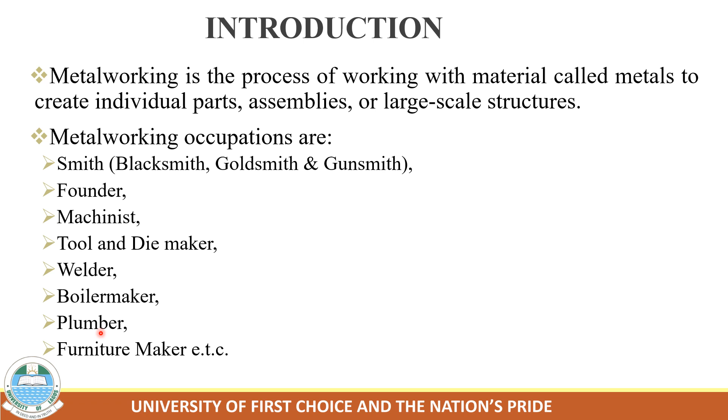So all these occupations are making use of metals for the fabrication, for production of tools and equipment that we are using in our lab, at our home, at office, everywhere. So anything that is made up of metals, these are professions that produce them one by one.

Metalworking. The term manufacture is derived from two Latin words, manus and factus. Manus means hand and factus means make, which means that metalworking is the occupation that involves making of any devices, any tools, any machinery with hand. That is the etymological meaning of manufacture. That is the root meaning of it.

And also the Oxford English Dictionary defines manufacture as to make or produce goods in large quantities using machinery. That is how the dictionary defines it. And let us move further. Manufacturing can be broadly classified into subtractive manufacturing, additive manufacturing, and forming manufacturing. That is the current classification of the manufacturing that is related to metalworking.

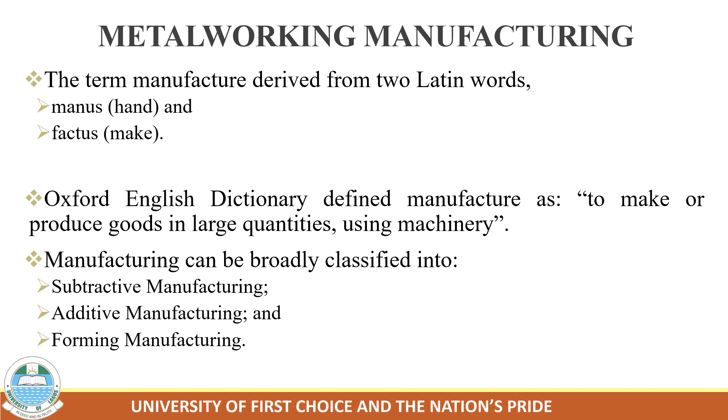Subtractive manufacturing involves removing sections of a material by machining or cutting it away. It can be carried out manually or more commonly by traditional or computer numerical control CNC machine. So this is a lathe operation. This one is a milling operation. This one is a planer operation, and this one is a shaper.

So there's a tool. All the machines have their own tools fitted to the tool post to remove some part of the material from the core material to finished products. So this type of operation that you see here is referred to as subtractive manufacturing. So you get your material that you want to machine to the precise dimension.

So the machine cutting tool will be removing the part gradually till it reaches the final stage of the part you are machining. So the operations that are involved in this, lathe, milling, planer, and shaper, are simply referred to as subtractive manufacturing.

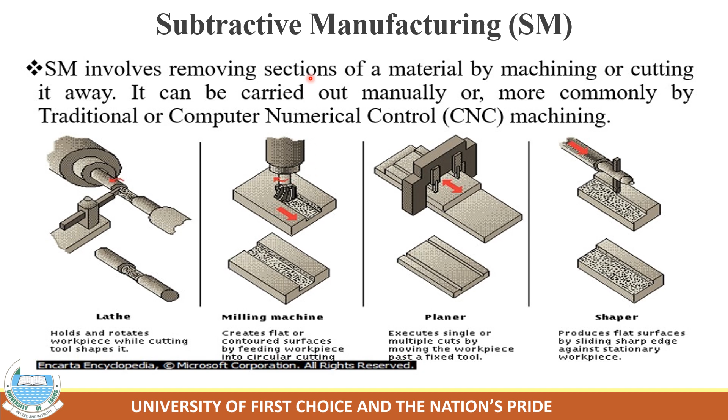The next one is additive manufacturing. It is a sequential sedimentation of materials to form a pre-designed shape. Sequential sedimentation of material to form a pre-designed shape. That is additive manufacturing. An example of additive manufacturing is 3D printers. 3D printing is very useful for rapid prototype development. So this is additive manufacturing.

If you want to produce anything with a 3D printer, you design it. After designing it, you load your machine with the drawing of what you want to produce, supply the filament to be used in the machine. So it will produce it layer by layer to the end. It will start from zero, 10, 20, 30 to 100% till it finishes the product that's 3D printed.

So all these prototypes that you are seeing here are 3D printed with a 3D printing machine. They are referred to as additive manufacturing. The subtractive manufacturing that I mentioned earlier, the majority of our machines in our physics workshop are subtractive manufacturing tools, whereas these 3D printers are available at the Innovation and Research Center of University of Lagos, at CITS. It's also available at the Central Research Lab of University of Lagos.

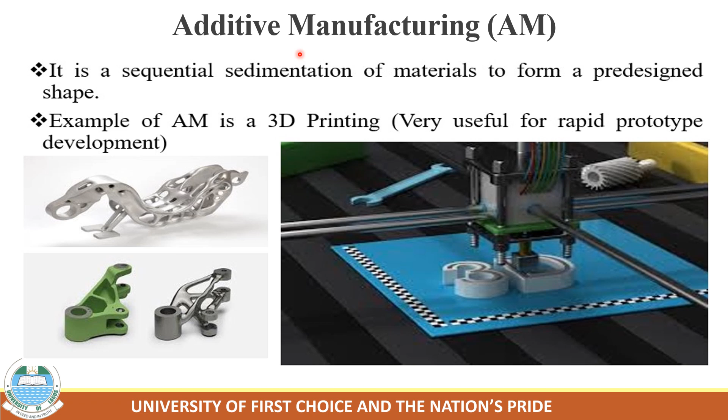And also, 3D printing manufacturing is not limited to metalworking alone. They are using it in building construction now. They are using it in woodworking as well, and to 3D print in the plastic industry as well. They are making use of it to 3D print any object you want. That is additive manufacturing. The next one is forming manufacturing.

Forming manufacturing are manufacturing processes in which the material is deformed plastically to take the shape of the die geometry. So what's involved in this one, simply in a layman language, it involves the blacksmith operation, the smith operation, the foundry operation, that's foundry and forge. Forge is related to smith, whereby you insert your metal into forge or furnace to soak the material, and you use hammer to beat to the required shape you want.

And as well, the foundry, that is when you melt your material, you melt it to a liquid form, and you pour it to a prepared mold to take the shape you want it to take. That is casting. So forming manufacturing is of 3 types. Number 1, bulk metal forming. 2, sheet metal forming. 3, powder metal forming. This is the classification of forming manufacturing. So the tools used for such deformation are called die, punch, etc., depending on the type of the process you want.

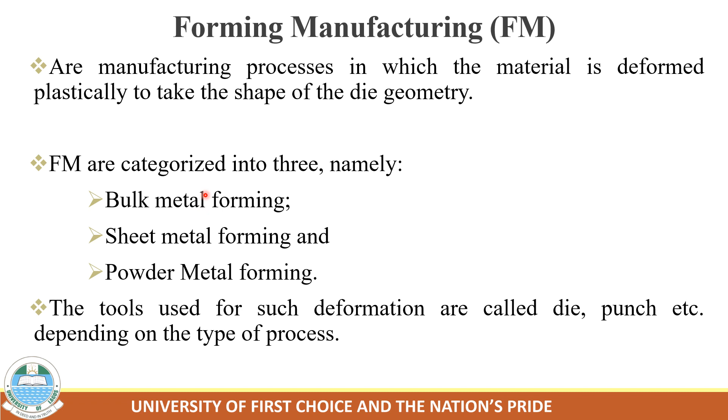Classification of forming manufacturing. So you can see the diagram here. The bulk forming is of this one. We have a primary operation, we have secondary operation. Under the primary operation of the bulk forming is the cast ingot to shape, such as bar, sheet, plate, and tubes. Whereby the bulk forming for the secondary operation involves forging, extruding, drawing, straightening, and sizing.

And the second type of forming is the sheet forming. Under the sheet forming, we have deep drawing, blanking, punching, bending, spinning, piercing, and shearing. And for the powder metal forming, under that one, we have powder forging, powder extruding, powder injection molding. So all these are classifications of the forming manufacturing.

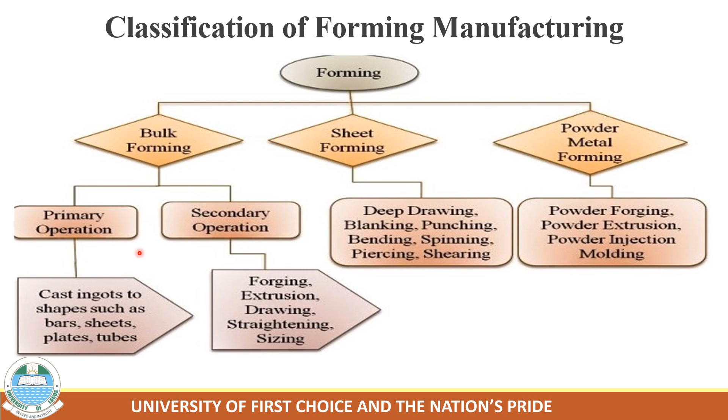Differences between subtractive manufacturing, additive manufacturing, and forming manufacturing are well stated here. So the additive, as earlier said, involves adding layers of material to create an object, whereby subtractive manufacturing is to remove material from an object, and forming manufacturing is addition or removal of layers, material that is not needed. So this is the difference between each one of them and the tools they are using. Check them properly and read it.

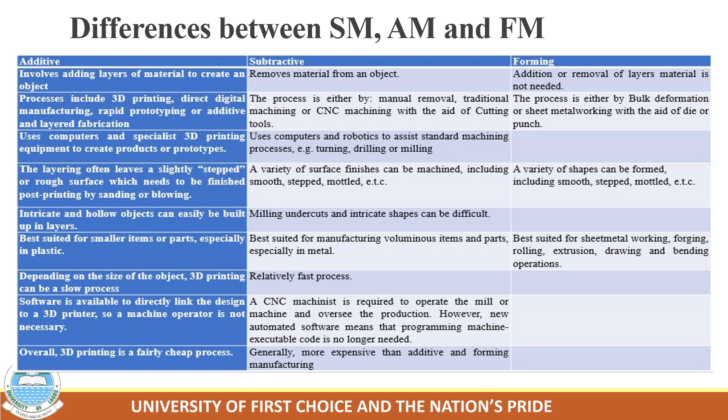Okay, let us move to the metalworking manufacturing processes. So there are different metalworking manufacturing processes. Manufacturing processes used in working of metal may be classified as: 1, processes used primarily to change the shape of metals. So these processes involve casting, forging, bending, rolling, etc. And number 2, processes used for machining parts to plane dimension. The processes involved are turning, shaping, drilling, boring, and sawing, etc.

And the third one is the processes which change the physical property of metals. So if you want to alter the microstructure of materials, you subject it to heat treatment, cold and hot working. I believe we've discussed this under material engineering, the factors that affect engineering materials.

So the next is the processes used in joining parts or materials together. So after you cut your metal into pieces, you want to assemble them together into a single component. The processes involved are welding, soldering, brazing, sintering, mechanical fastening, and adhesive bonding. So if you want to assemble your different metallic parts together after you've produced them, either with the 3D printer or with subtractive manufacturing or forming, these are the methods you are going to use.